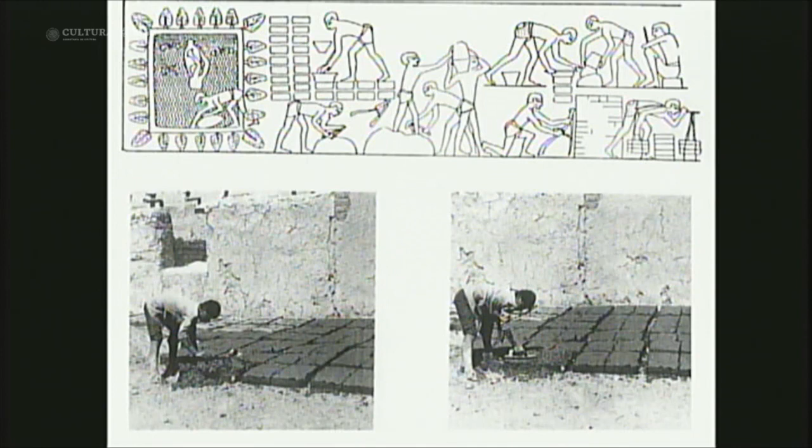Before permanent settlements, other types of provisional constructions were built, and funnily enough, in some parts of this planet, they remain in construction. The first permanent settlements appear, and they were built with masonry, with land, with bricks. The brick was created 8,000 years ago. Clay mixed with sand, with straw, and this is a technique that is still used in Africa, for instance.

Now, walls are covered with wood roofs, and 6,000 years ago, the arch or the vault was created. We don't know exactly where it took place. It may have been in Egypt, Asia Minor, Mesopotamia, and this has 5,000 years, as a tomb. Now, this is a technique that uses bricks, and it's still used in the north of Africa.

2,000 years afterwards, before Christ, these vaults were mainly building tombs, but they emerged from the subsoil, they multiplied spans, they moved from 1 meter to 1.5 meters to 5 meters, and they created in Egypt some silos that remain to date.

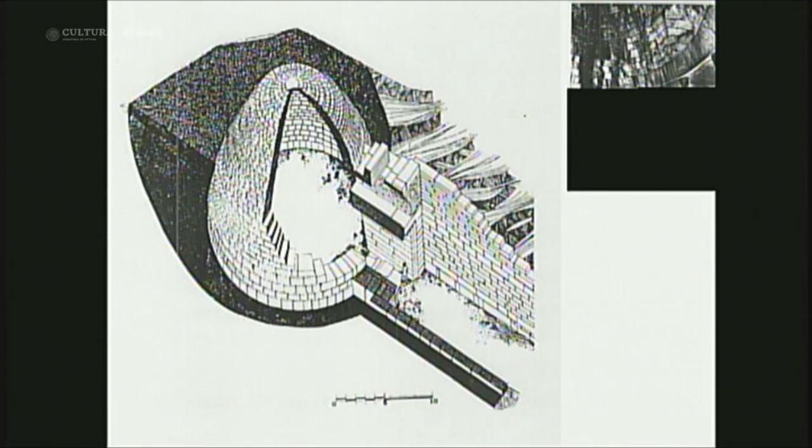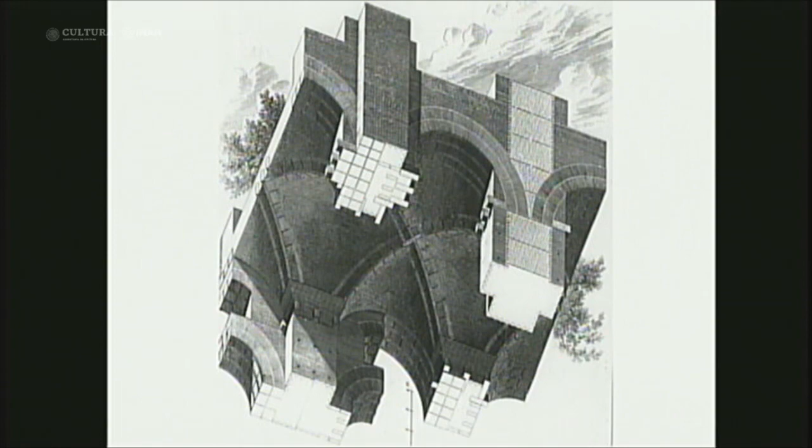Babylonia, of course, made a systematic use of arches and vaults. In Babylon, they also used bricks. They used pebbles. Next came the Romans, and they used a new material. It was cement made with small pebbles. So they first built pristine walls, and in the Empire era they multiplied spans by 5. So instead of 5 meters, they became 25 meters, and some of these vaults remain in place.

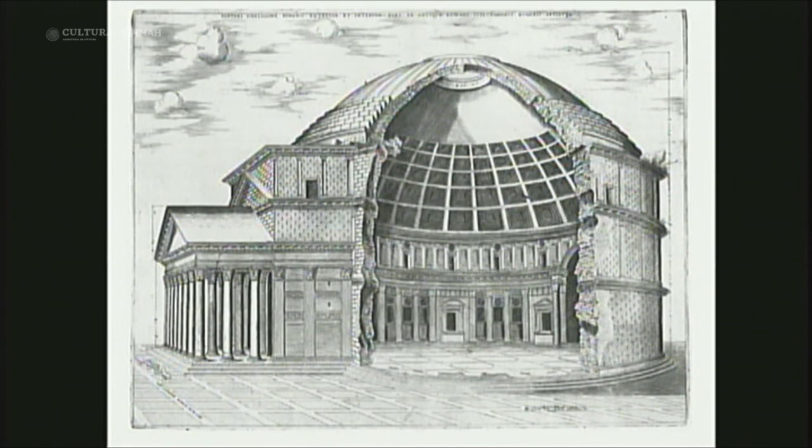Nothing is eternal, not even Roman cement. And in the 18th century, the temple still used that dome. The Roman Pantheon is 2,000 years old. It's still in place. It has not been abandoned, but it has not received a structural redo.

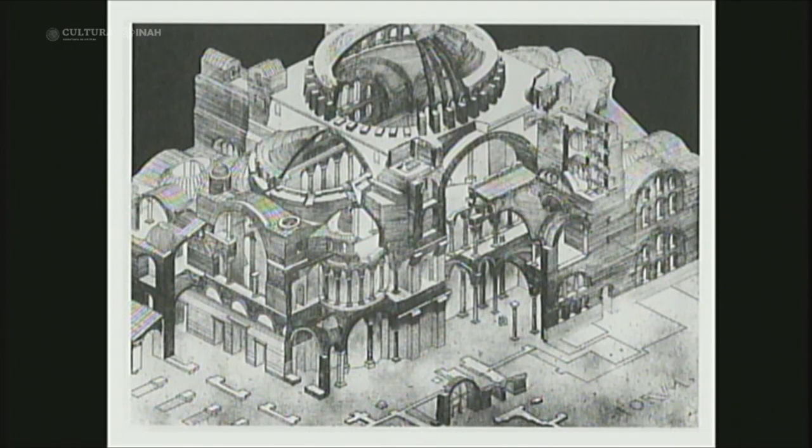Ctesiphon, we're talking about the 3rd or 4th century after Christ, and it has survived earthquakes and Iraq's war. Santa Sofia, 6th century in Constantinople, built by Isidore of Miletus. We have Anthemius of Tralles as an architect. Architects were actually these two that I've mentioned.

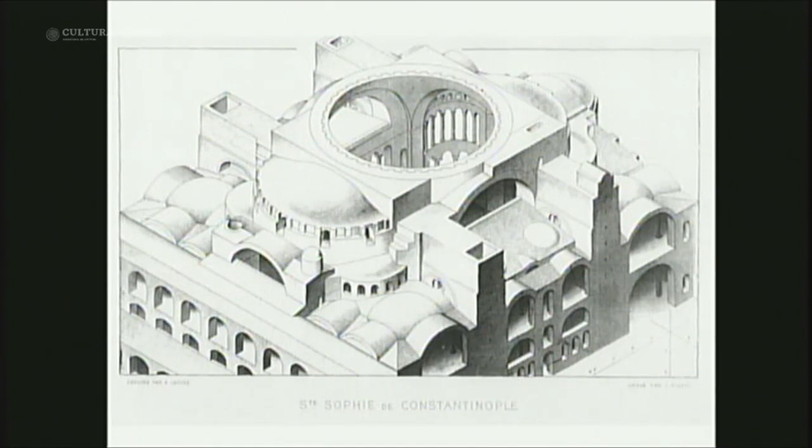They were mechanicals. That was the highest degree that architects were given, since they were not only working with architecture, but they were familiar with gravity and Archimedes' volume calculations. And not only Saint Sophia, but any tourist that goes through Istanbul sees many buildings that are over 1,000 years old and they remain in place. We have Saint Irene, and it's a wonderful building.

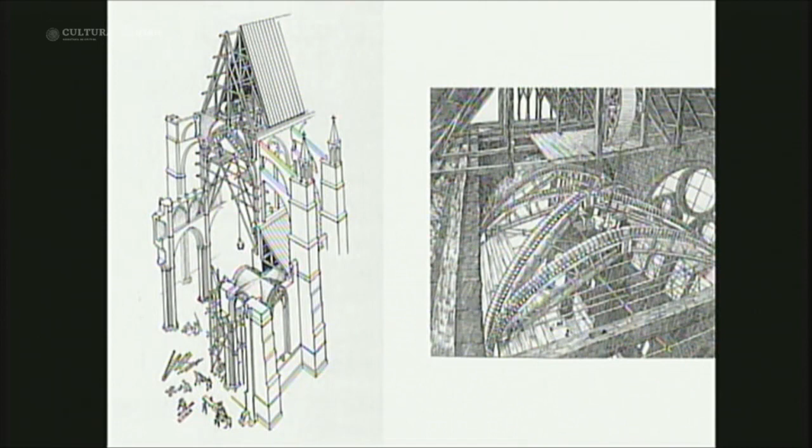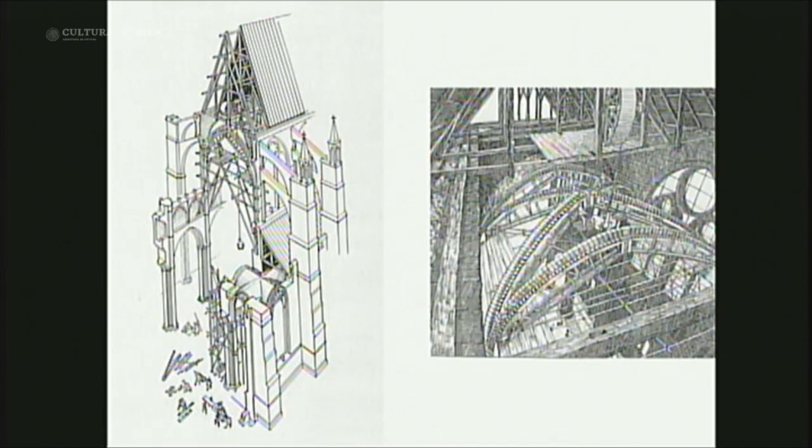These are the basis of the Gothic times, and these cathedrals are in balance. They nowadays represent some fear to modern architects. It's not only a miracle for them to remain in place, but we need to think that throughout the whole construction process, they remained standing. This may be the oldest image that shows Alfonso X, and it is a fascinating subject.

Gothic construction has been written by many authors. We see St. Peter from Rome.

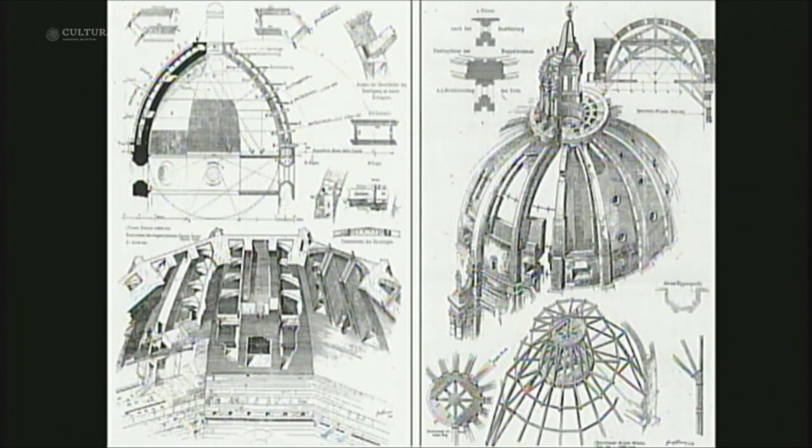Mixed Spanish and English interpretation: the lantern weighs 1,500 tons, the drum weighs 10,000 tons, the dome was closed in 2 years. St. Paul's, Christopher Wren's great invention, a magnificent dome that fits within St. Peter. Another feature of masonry is that it can be used by different sizes, so we can place a building within another building. In the Baroque, domes were still used. In the mid-19th century, a worker built this dome in Malta with almost 40 meters of span.

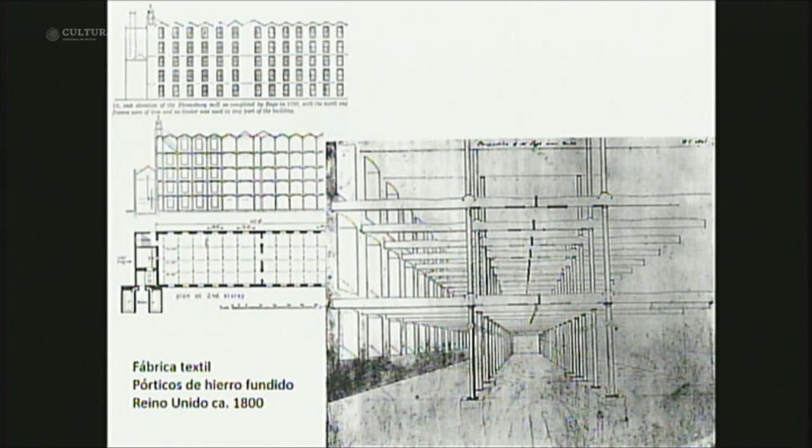Mixed Spanish and English: Now, bridges. For centuries, since the Romans, bridges have been built, and let me share an anecdote. In Salamanca, a couple of decades ago, I saw a notice: Roman Bridge and New Bridge, and it said heavy traffic through the Roman Bridge. In the 19th century, this millenary tradition started suffering competition from new materials. The industrial production of cast iron allowed lighter bridges. The first cast iron porticos were created, made by founders, not by architects.

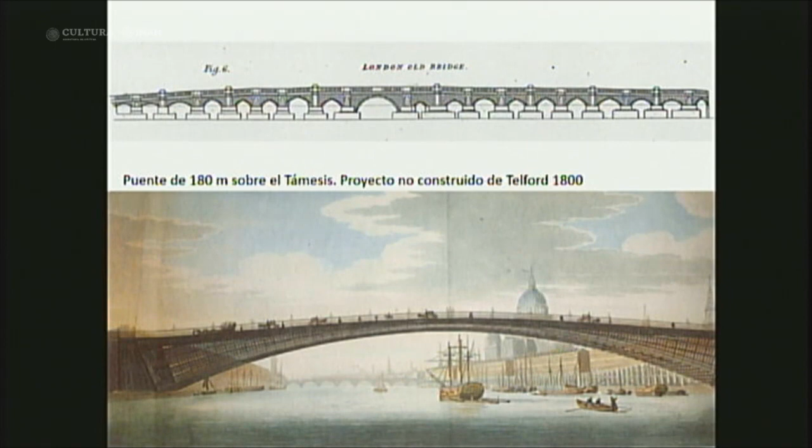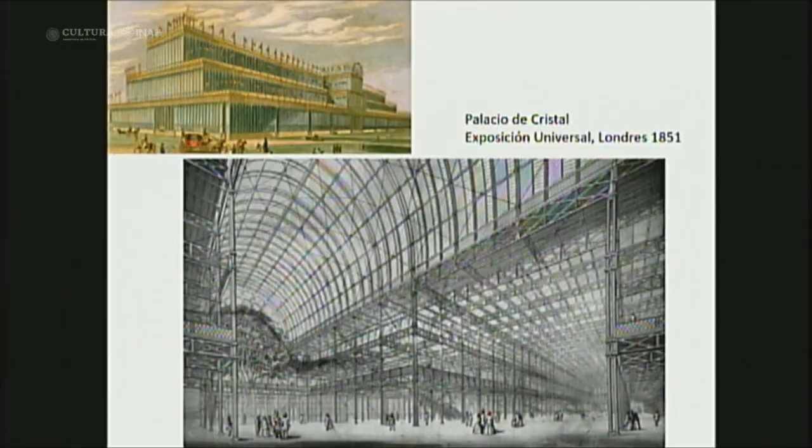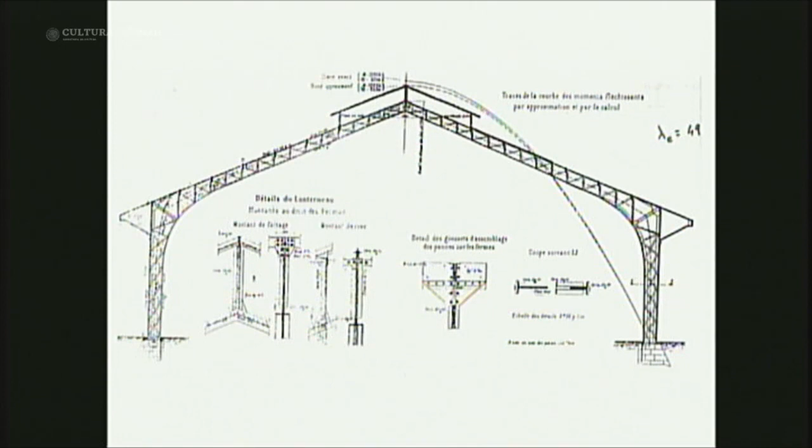Mixed Spanish and English: In 1800, Telford presented a project for a competition, an arch of almost 200 meters span in cast iron. This is one of Telford's cast iron bridges still standing. Cast iron is fragile and doesn't resist tension well, like masonry. It's good for arches and pillars, but beams sometimes fail. The last great cast iron building is the Crystal Palace of London, which lasted until a fire in the 30s. Forged iron in profiles allows creating trusses and stations.

Mixed Spanish and English: In the second half of the 19th century, forged iron works in tension and compression, allowing things like the Eiffel Tower. At the 1889 Paris Universal Exposition, the theme was the triumph of iron. Here the Eiffel Tower is compared with the Cheops Pyramid, the Strasbourg spire, St. Peter in Rome. The engineers were proud and wanted to show the supremacy of the new material. The architects kept to their own.

Architects remained in their own field. They didn't believe iron to be a very representative and beneficial material. Now, 1900s projects were done by architects, and this is what they did.

And how is this sustained? Well, just as structures as the Eiffel Tower. Modern architecture was within this last eclectic architecture that had lost its way. Some architects still bet for masonry.

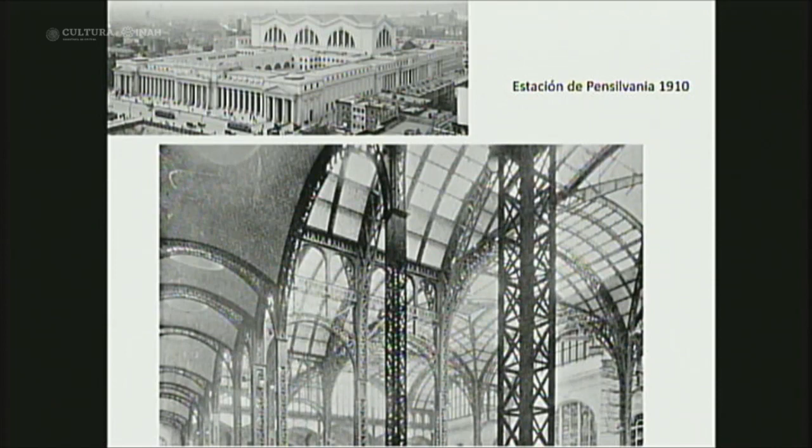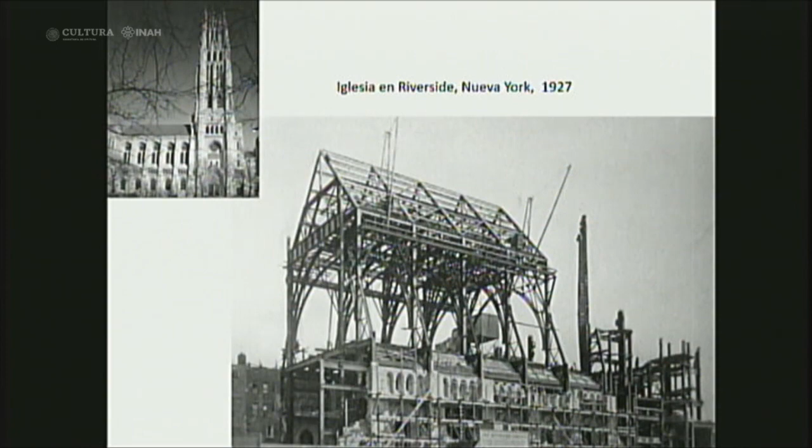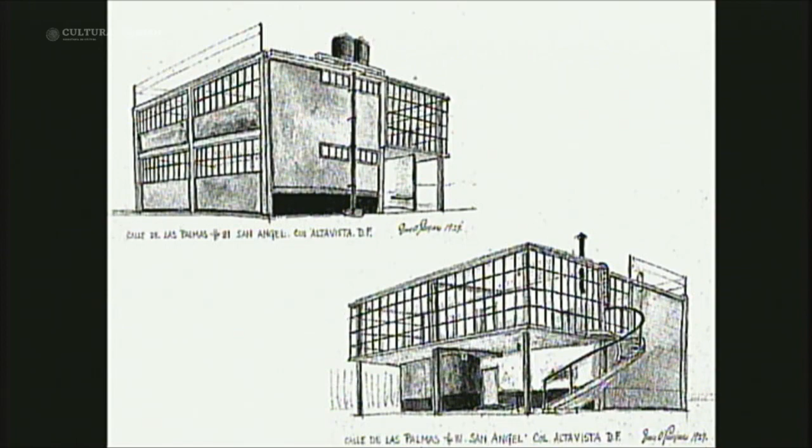So towards the 1930s, cement was more used, coinciding with modern architecture. In the 20s, they were using the Bauhaus, Le Corbusier. In Mexico, we see O'Gorman. Now, why is this related to masonry? It is not. It is not related to it.

A Gothic cathedral is not a reinforced concrete portico or porch. It is different. It is a tradition of masonry that was lost through the 20th century. Nowadays, theory and construction of masonry structures is not taught in engineering nor architecture schools. And as a professor, I am concerned about it.

We hand degrees that signify that architects can work in this type of building, but we don't devote even half an hour of official credits to explaining how they were built and how they work. Now, this is not a homogeneous material, it's not elastic, it's not isotropic. We cannot define elasticity. We do not know how it is supported.

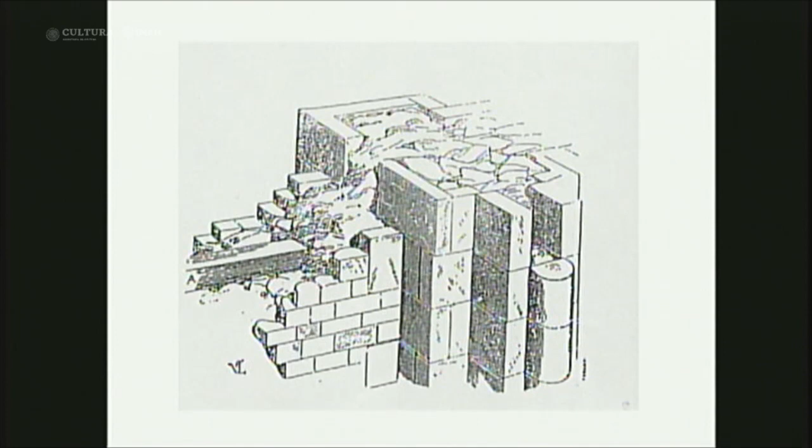It usually is cracked, and the filling that constitutes 90% of this wall is usually masonry resulting from the previous demolition. The Romanesque church is within the Gothic that took place afterwards, and in Spain, within the Romanesque is the old mosque, and within these is the Visigothic church.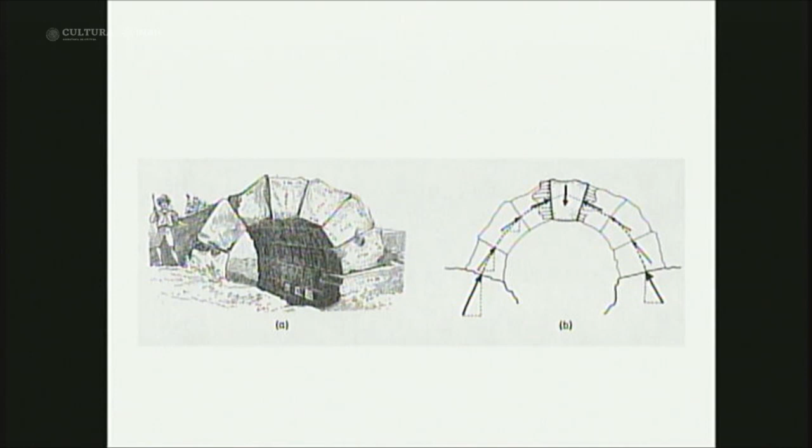This factory is a unilateral material. We say in argot that it needs to work in compression, not in traction. These factories should transfer compression. The arch needs to have a certain shape so that compression forces can be within. It's not working in flexion, which is typical of 20th century reinforced concrete porches.

Now, this is cracked, which is not bad. This is adaptable since it has that feature, that it can crack. Terenzio, Italian from the 30s, when he did the second to last restoration, discovered these cracks. These are behind the surface, meaning that it is still present. So he reflected upon these cracks.

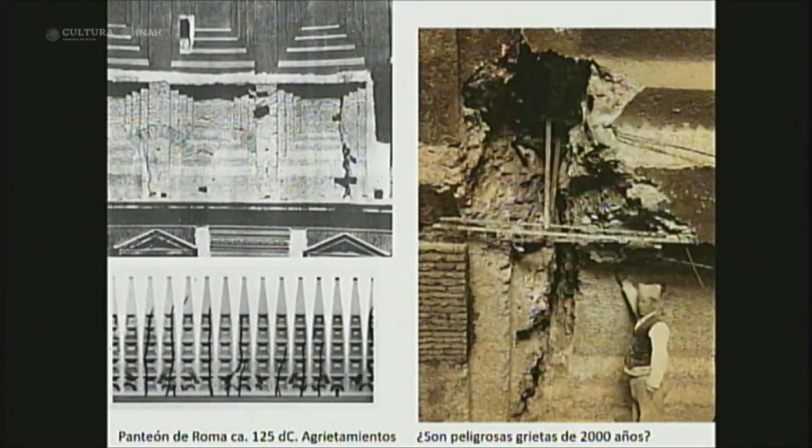He said it's not only that your hand fits in, your whole body could almost fit. These are 2,000-year-old cracks that happened when it settled, and a 2,000-year-old crack, we can say, represents no danger.

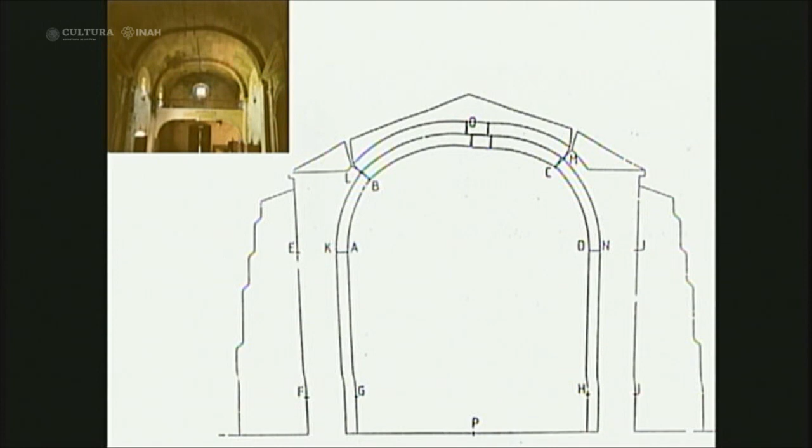This church is in the northern part of Spain, in Galicia. It's a long story, but back then these were built and that's how they remained. It was initially a barrel vault, but now these have opened up, and this is not an exaggerated drawing, this is how it is. And we cannot explain it within elasticity theory, nor with a program on finite elements. Now, in Gothic structures, there are also cracks, but what happened?

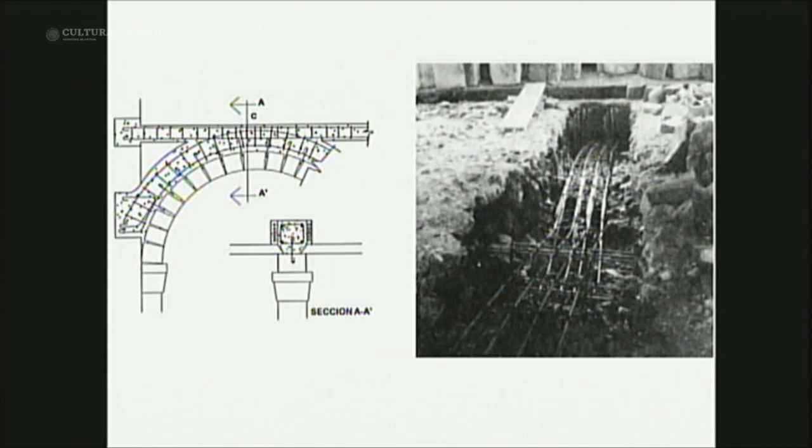After the Second World War, reinforced concrete benefited from the 19th century masonry and from its wearing. So they said masonry is not good. But these are the buildings that have survived wars, earthquakes, floodings, but they don't work well. These are not made out of reinforced concrete.

So what is it that engineers and architects do? They improve masonry. If it lasts 1,000 years, but they say that it is not good enough, then they decided to improve it. Therefore, part of this masonry was taken down, and they included reinforced concrete. This has been the usual practice from the 60s. It came from earlier times, and we're about to write the story about the reinforced concrete in masonry.

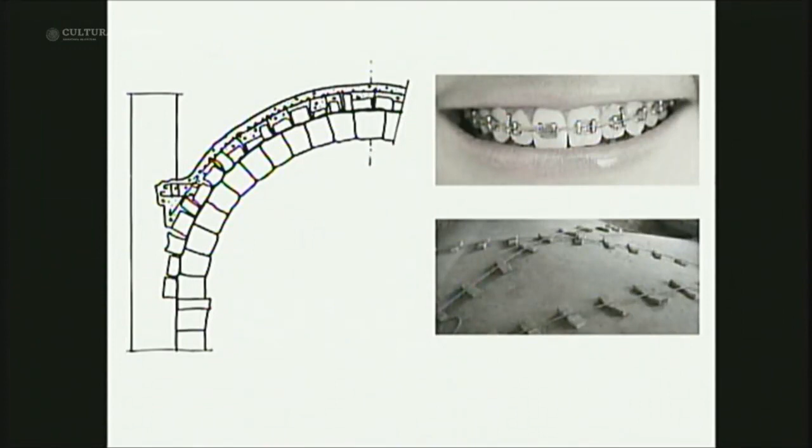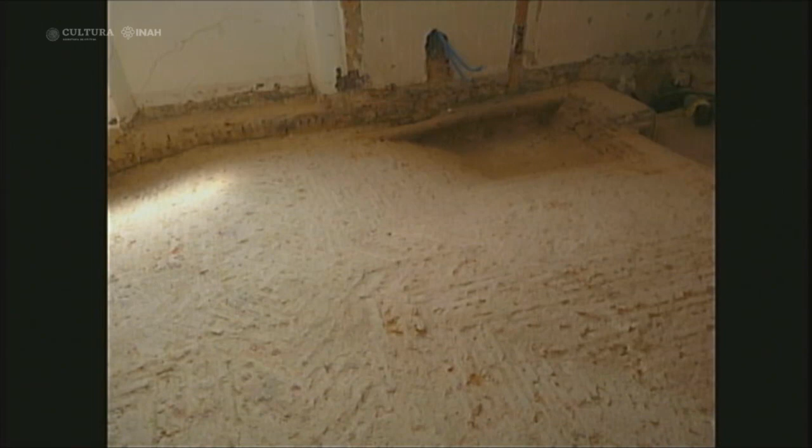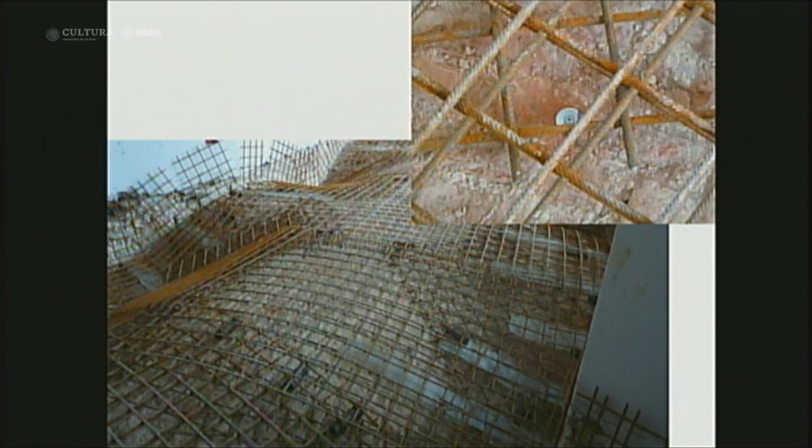This is within Santiago de Compostela. So these type of brackets that we need to adhere in buildings, it turns out that they are damaging, and the trend keeps on its use. These vaults remain in place after the Aquila earthquake without any cracks, and this was the intervention. Placing a double mesh from a reinforced concrete, which will need to be placed with a trowel because it's a very small hole, and then it'll connect to the stone.

Of course, this has been done out of good will. We all want things to last forever, such as the reinforced concrete. But things don't last forever. We need to maintain them and not violate their nature. Reinforced concrete is almost a bomb. In Spain, we are now trying to remove reinforced concrete. In the case of towers in Santiago de Compostela Cathedral, we needed to demount the whole dome in order to remove a 40-centimeter reinforced concrete that's damaging the stone. And it's been less than 50 years from its use.

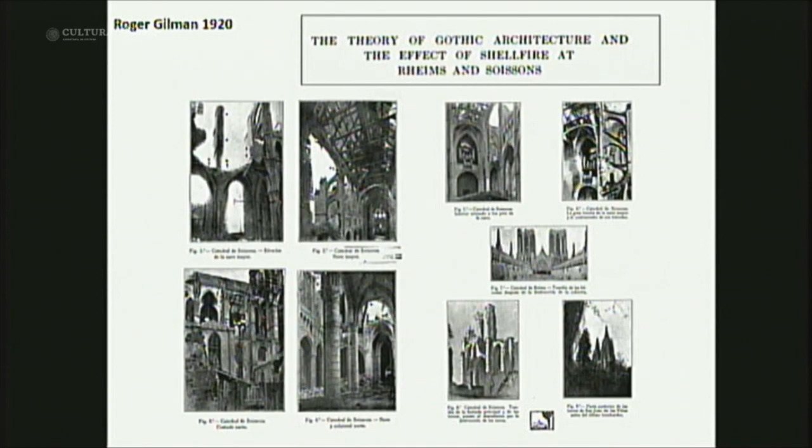Now, going back to the origin, this so-called fabrica is a material that has its own characteristics. It's the brick and mortar construction, and it is a millenary technique that we should know, just as these men knew it in the north of Africa. The brick and mortar construction is resistant, and it shows after the First World War bombing. Roger Gilman intended to deepen the Gothic studies, and yes, even though these were bombed intensively, cathedrals didn't fall. They didn't fail entirely.

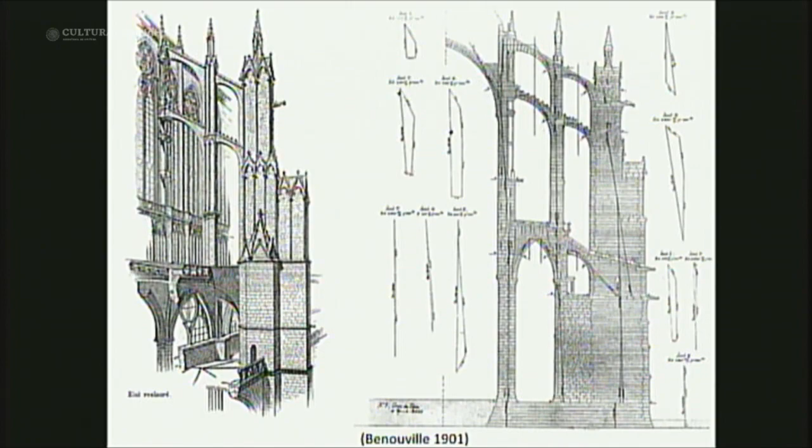By the late 19th century, engineers decided that if it cannot be calculated in its elasticity, then it is not well done. In fact, stone bridges are calculated as if they were elastic. But I don't think that a stone bridge is elastic at all. Now, Benouville did a static study with equilibrium, and it shows the evidence. These that have supported almost 800 years, they are well mounted. Gothic masters knew their trade.

In the 50s, Klaus Pieper was the engineer who reconstructed most of the structures in Lübeck. The Marienkirche, it's very well formed. It has a 40 centimeters pillar, and he said he included this geometry, did some equilibrium calculations, and he reconstructed this church, including some reinforced concrete. Otherwise, they wouldn't listen. But it was very little.

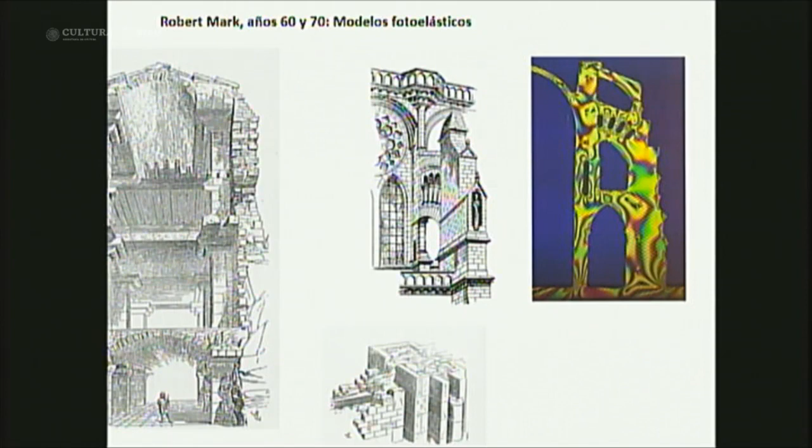And what happened in the 60s and 70s? This idea that it all needs to be elastic, continuous, just as reinforced concrete, was transferred to several engineers. Since there were no computers, they used photoelastic methods, and it is impressive for anyone to believe that this is just the same as this other image. These buttresses are filled, they have filling, it's not even clay. But it doesn't stop there.

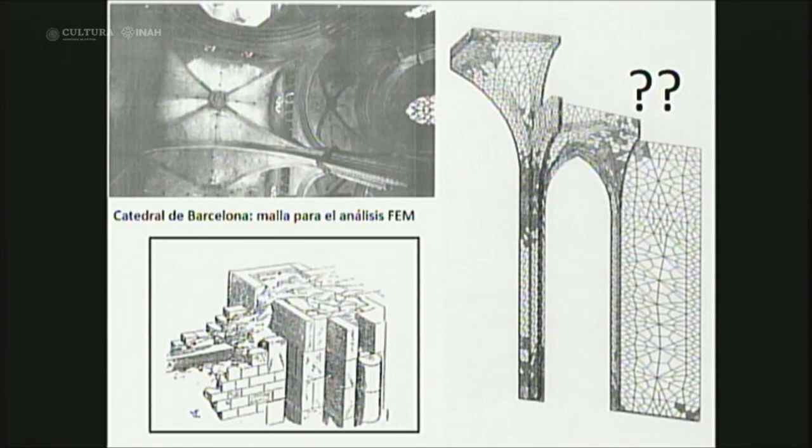Afterwards are finite elements, linear, non-linear. With information that is not of our knowledge, we need to say, is this elastic, homogeneous? And we need to know its boundary conditions. We have people refining meshes, and well, these are the images that are in color originally.

Now, what happens with structures and their theory? The 19th century is the elastic century, the elastic theory century. It is a fantastic element, and in the early 20th century, some engineers noticed that elasticity calculated by hand or by computer did not have anything to do with the real state of structures. John Baker in England, which is a long story, developed the plastic theory. The plastic theory doesn't want to know tension at each point from finite elements, but rather to know the structure's resistance and its collapse. It was successfully used in steel portal frames.

Now, Jacques Heyman from Cambridge, he's still alive and is one of the greatest theoreticians of the 20th century, and he noticed that this brick and mortar is also a plastic construction, meaning that brick and mortar include plasticity, they are cracked, and we are able to calculate its load capacity, but we are unable to know its tension.

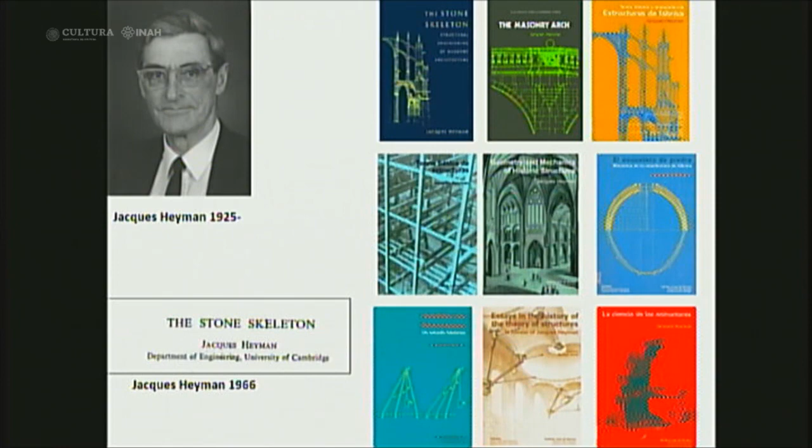There's also a theory explained in plenty of books written by Professor Heyman. Some have been translated to Spanish, and Professor Aroca and myself both believed it to be fundamental to have these books translated into Spanish, for people to have access to this basic theory. This is the right theory that allows us to understand and, in certain circumstances, intervene in structures.

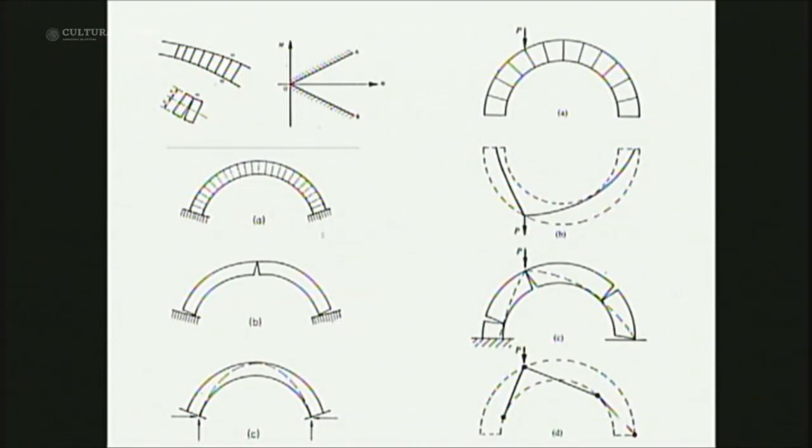We are now able to calculate the arch collapse load, and if we do calculations in the lab, we have a distribution. In England, before demolishing a bridge, if you do a test, this is exactly the same result.

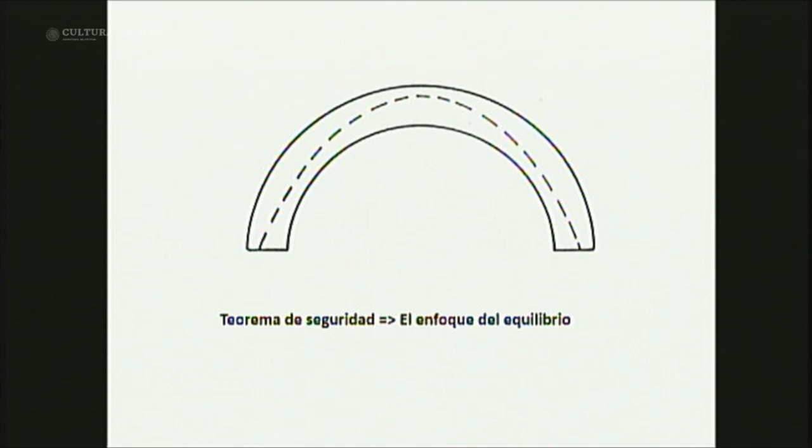Now, within plasticity theory, there are three fundamental aspects, but the most important one is the safety theorem. It says if you're able to find an internal strength distribution, the structure will not deteriorate nor plunge.

So this is, the material needs to work in compression. If we are able to draw a compression curve within this arch, then it will not collapse. It will be cracked in certain movements, and we are unable to know the real arch state, but what we know is that it will not collapse.

This fundamental theorem explains what we've just seen. It is that resistance and safety that depends upon geometry. If geometry stays in place, then the structure will remain in place, which explains that this vault was adapted and it did not collapse, which comes to show that Pantheon cracks are simply just a way in which they are adapting, a cracked structure.

These are the cracks that we've seen before, and for safety purposes, they are irrelevant. If masonry were damaged and a stone were to fall, then that'd be dangerous. But it happens in a roof. If a tile is not well placed, then it's also a potential damage.

Well, this was a graphic analysis of that bridge. The graphic static, therefore, is... This was considered by late 19th century engineers as crude, and it was used by some architects. Graphic statics is a search for equilibrium. You may try to find equilibrium including differential equations or through a computer.

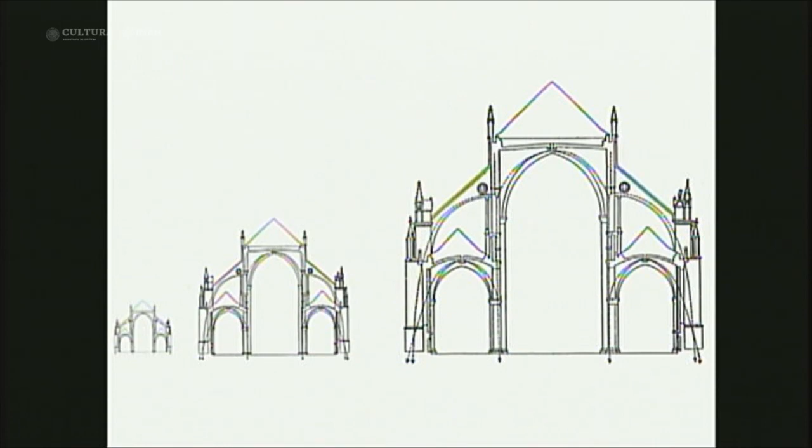Obviously, these rules were for canon cases. There's also extraordinary cases such as the Cathedral of Palma de Mallorca. It has a lateral vault of 9 meters, and in this case it seems impossible. How could these very thin pillars that are twice lighter than usual, how would they be able to support the lateral structure? Well, Gothics knew that in order to have stability, you needed to load it.

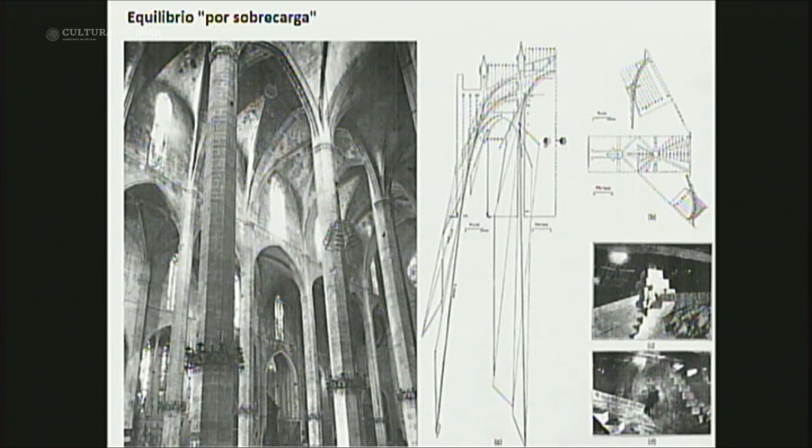So this weight on top of these pieces give equilibrium. And it was done by a Gaudí's student. So the vision from studying construction history and studying proportional rules from Gothic teachers, they say that cracks do not matter. From the Baroque, yes, there have been reports saying that cracks are potentially dangerous, but in the Gothic times, it seems that they were ordinary.

And this quote from Viollet-le-Duc is almost poetic, but very lively regarding safety. The skeleton either remains in place or collapses. It follows needs and a location. It seems to be alive. It seems that it is obeying opposite forces, and stability is only acquired through these forces and their equilibrium. So, equilibrium and stability comes from masonry and also reinforced concrete and all the movement that happens right there. And it's part of these skeletal structures.

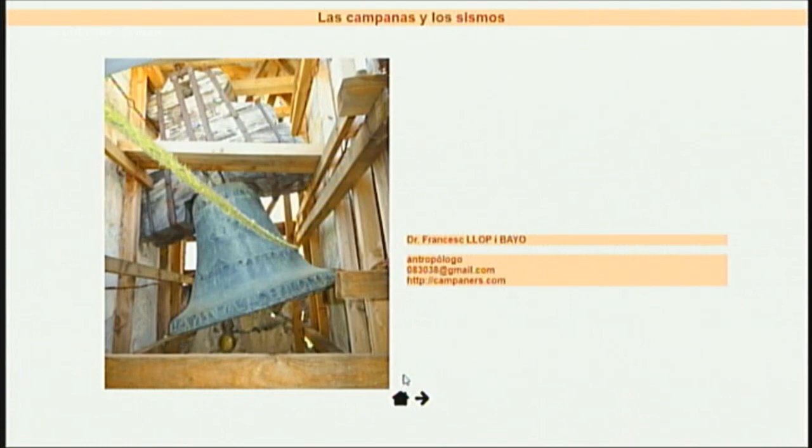We would need more comprehensive intervention strategies for bells rather than just bringing them down and recasting them or sending them to museums. We need to have an intervention that considers not only the bell but also the ringing of the bell, and to create a specific protocol to recover bells. This is something that we have not done yet, but I wanted to share with you an experience that goes back 6 or 7 years.

For example, the Cathedral of Pamplona had not rung its bells for 70 or 80 years, and there were a lot of people that did not know how to ring the bell. However, they have come together to learn how to ring the bells like the ringers did 80 years ago. So the bell is used now as the voice of the community, and that's the focus that we should give to our intervention proposals.

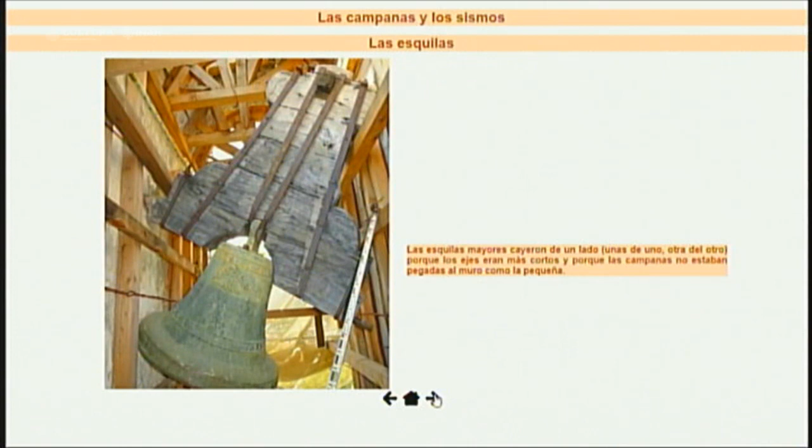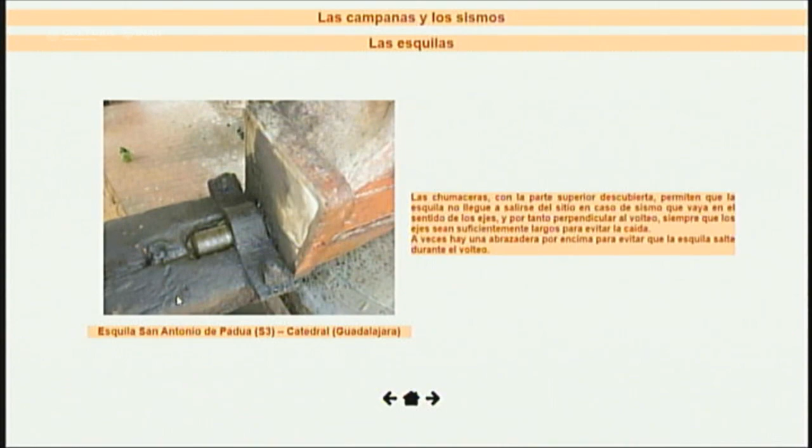This is the bell of Tlayacapan, and somehow the walls in the belfry did not move at the same time, and the bell fell because the bearing was not placed with a traditional structure. So, for example, here what we see is the shaft. The shaft is longer than normal, and it is covered, so the bell would not go up and get displaced from the shaft.

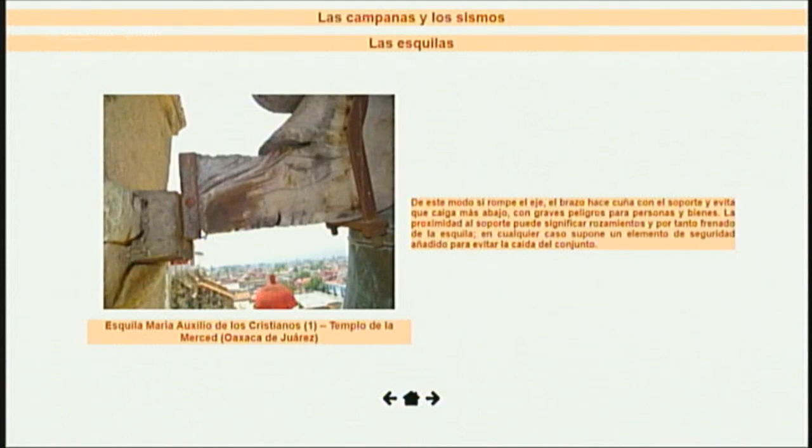So what I mean is that old experts or traditional experts placed the bell in a way so that the forces or the stress would be transferred to the support and to the shaft, and sometimes they would also place bearings that would prevent the rest of the structure from cracking. And this served two purposes. First, preventing the bells from falling, of course, but also ensuring that the sound was nice. The best example of this is the bell in the Cathedral of Palma in Mallorca.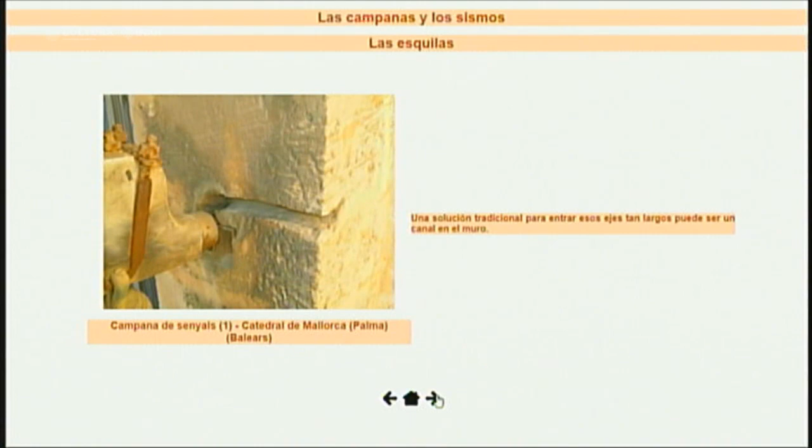And the shaft is still long, but the shaft goes into the structure, and it has a channel that the shaft can displace into. And there are other solutions that are impossible in Mexico, because there are shafts that could shrink, but these cannot be implemented in Mexico. But the Mexican solutions enable the bells to turn on the shaft.

However, since our cultural heritage doesn't make sense except in the context of a society and the context of crazy old people like me, and if we only think about our cultural heritage as something that attracts tourists, then we don't really get into something such as this. However, cultural heritage should in fact give a sense of purpose to the community. The problem right now is that bells should not be electric.

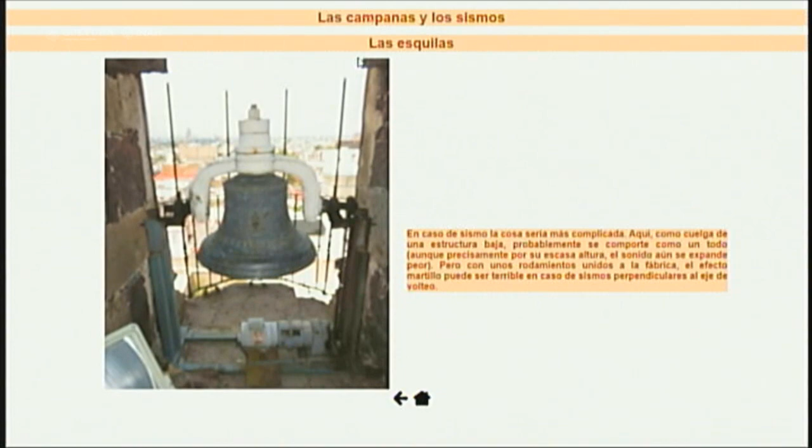The interpreter apologizes. There are technical difficulties in the booth and sound is not coming in. Once again, the interpreter apologizes. Sound is not coming in.

A lot of people think that progress is just the fact that you can push a button and then a bell rings, but this is not progress. That is why, a while ago, I was recommending that we should use or have a bell recovery protocol that is based on traditional methods. In fact, this is something that I proposed in Valencia.

We intervened a series of old bells in the town of Teste, and there were some bells that had wooden structures, and some of them didn't have the shafts that I have just mentioned.

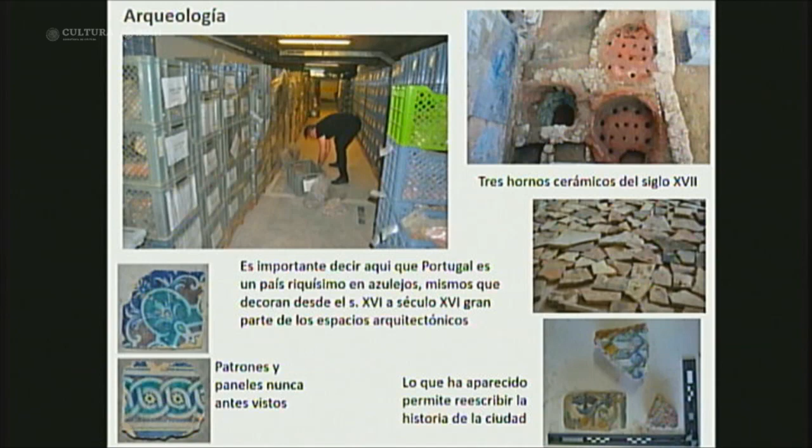Bearing in mind the assets, we now are able to know which ones disappeared and collapsed and which ones didn't. Now, this is a very important part. Lisbon is currently a city filled with interventions to assets given to tourism. Many buildings are under refurbishment, and there are also archaeological excavations that tell us what was used at that time, including which were the structures used in the 16th and throughout the 18th century. All of this was a consequence of the earthquake.

We are now able to write stories. The tile story. Tile is very renowned in Portugal as well as in other countries, and through archaeological excavation we're able to find new patterns as well as new artisan models. This image shows tiles with burnt glass, and this is the aspect they have under such circumstances.

In Portugal, we are all waiting and we're ready for the third earthquake. Since it happens every 2 centuries, we are now reaching the end of the 2nd century, and there are many news related to it. We need to be careful. We are aware that the next earthquake is about to get to Portugal, but in reality, Portugal is not ready to face these events.

Most of our buildings in tiles that are in the facades, they are placed but misplaced due to mistaken interventions. For instance, due to this, there are plants growing on the top of the roof.

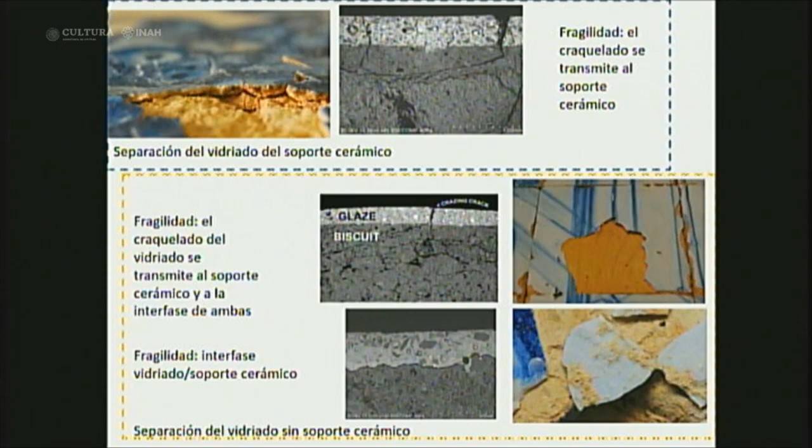And as part of my PhD studies, I placed several tiles from different times. I conducted trials for a year and a half, and we noticed that when we have a fragile tile, if there are crackings, it cannot resist and it'll lose the whole glazing. Water will expand, and it seems as if the tile is cracked due to the water.

The conclusion reached is that if there were no water, then there wouldn't be degradation. The issue lies then in water. If the building is in good conditions without humidity, then there are no issues. But in this room, there are salt issues.

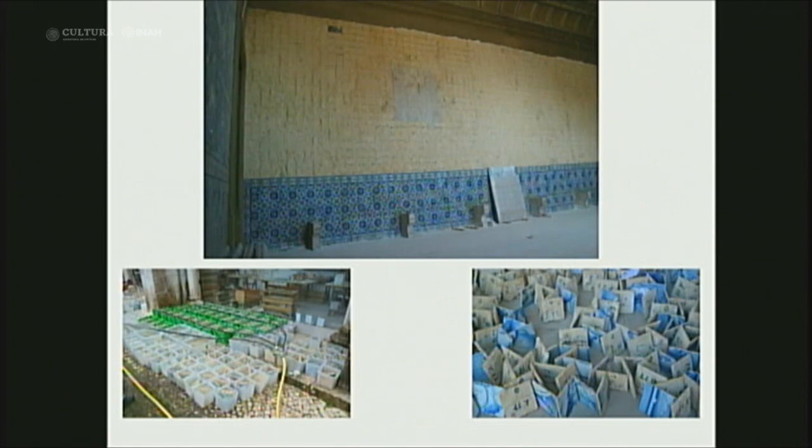However, there is a groundwater problem. Because of it, we needed to seek another solution. We need to include the acid in our intervention. In here we included a new system. All of these tiles were intervened, and we placed them in the Aerolame, which is used in aviation.

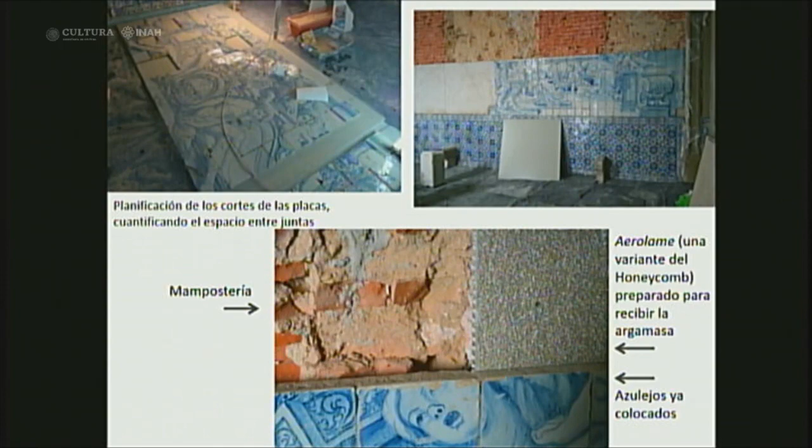We created an air box, and through masonry we created tiles, and by using traditional materials we placed tiles on the walls. We place them just as it traditionally is done, through mortar uses.

We also had glazed structures, and we noticed degradation. Therefore, the same solution was implemented. In this way, salts don't reach the ceramic, water does not reach it either. And now I'd like to introduce some degradation cases, or rather intervention.

The National Tile Museum addresses restoration differently. Our intention is reconstituting areas that are missing, since that's the only way in which people will be able to enjoy these structures. Now, there's also the possibility of not reconstructing and leaving these areas as they are. We can also conduct several interventions.

This is a very complex site. Areas that lost panels were reconstructed with tiles without glazing. But in these cases, visitors noticed that there was a structure, and we decided to leave the glazing damages. We left them as degradation signals and its evaluation. Now, in here, people are only able to see mud and these holes, and it becomes complex.

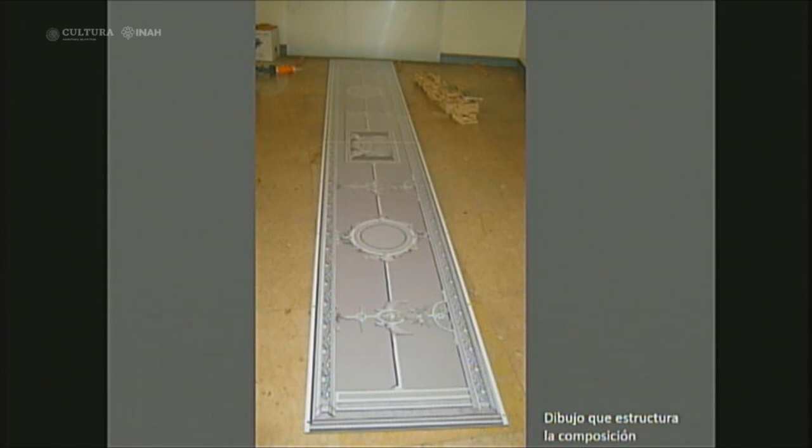This was a different location, and it was easier to have the design on the bottom. It was printed and tiles were placed on top of the design. So it was easier than the first solution I presented you with. This is a tile ruin, but what would it be like? This is what it'd be like, and we allow people to analyze, see, observe, and study what this panel would correspond to.